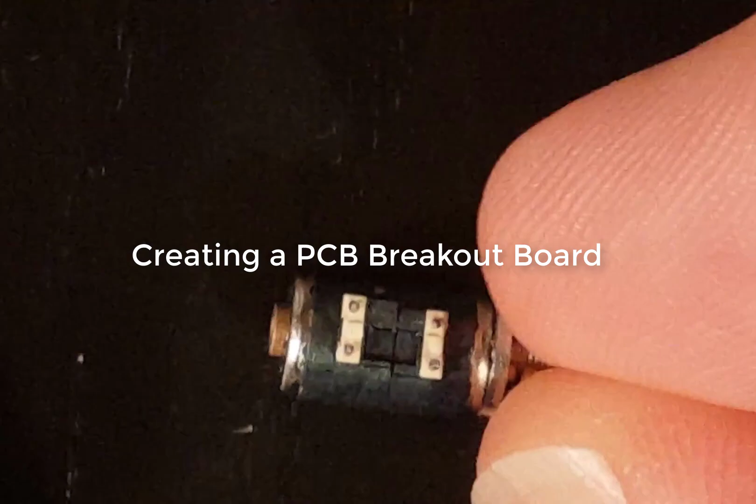I am going to try to connect this little stepper motor. You can see how tiny it is compared to this NodeMCU and this DRV8825. But I need to get wires connected to these little pins. You can see how tiny they are.

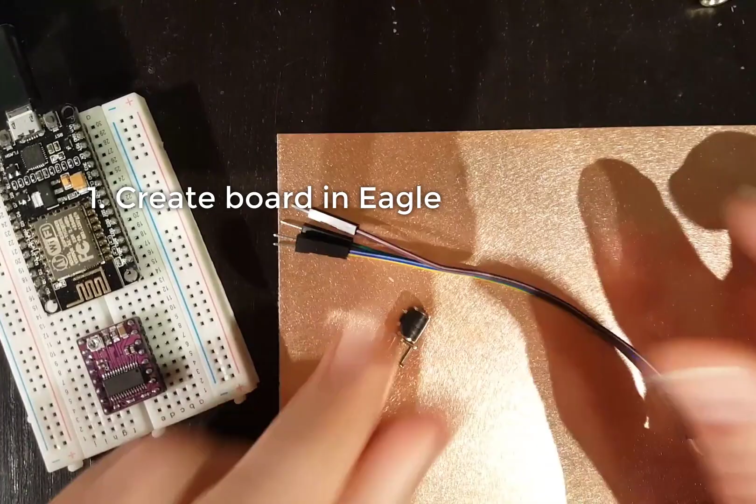So what I'm going to do is take this really thin FR4. You can see how thin it is. It's about 0.8 millimeters thick, and I'm going to mill it out so that it sort of makes a connector. Because I've got to connect these 4 wires to it, I'll kind of cut these off and solder it to it. So I'll show you how to make the board in Eagle, and then how to use ChiliPeppr's Eagle board import to mill it out.

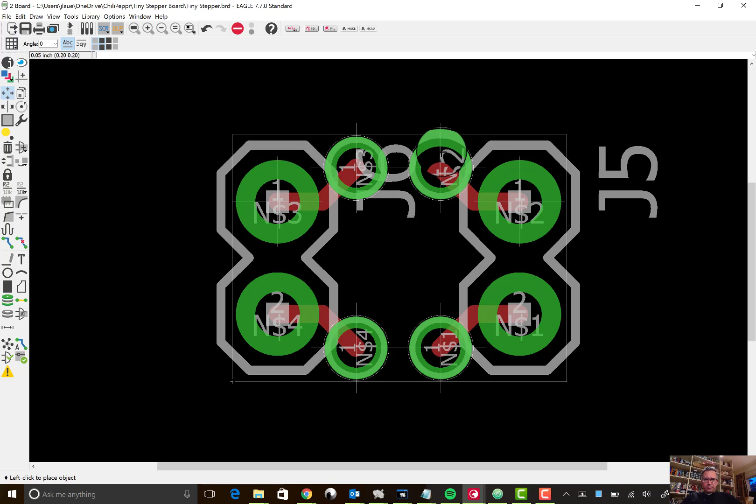So I'm in Eagle, and I created a quick schematic. I'm generally mimicking the layout of the circuit board. And here's the board I laid out. The one thing I had to do was really make sure that these pins were the correct dimensions away from each other. So we'll save that out, and then I will drag this board in. So of course ChiliPeppr's got an Eagle board import widget that's got some pretty nice features to it.

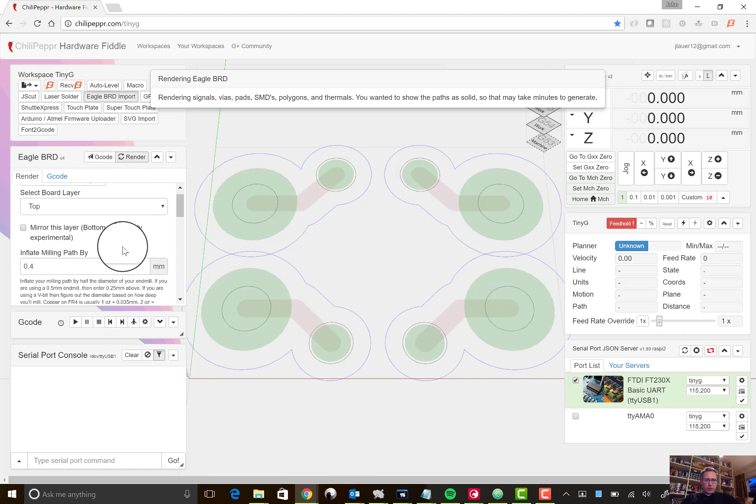The important part is I only have a top layer, the milling path. I could probably go a little bit wider. Let's say I did 0.4, and when you tab out of that, it's supposed to re-render, but here I'll hit render. And they kind of overlap, which I don't mind because as it drills, it'll create isolation traces anyway. But maybe for the sake of cleanliness, let's see if 0.35 gives us right at what we want. No, we'll go a little bit smaller because you can still see there's a little bit of overlap there.

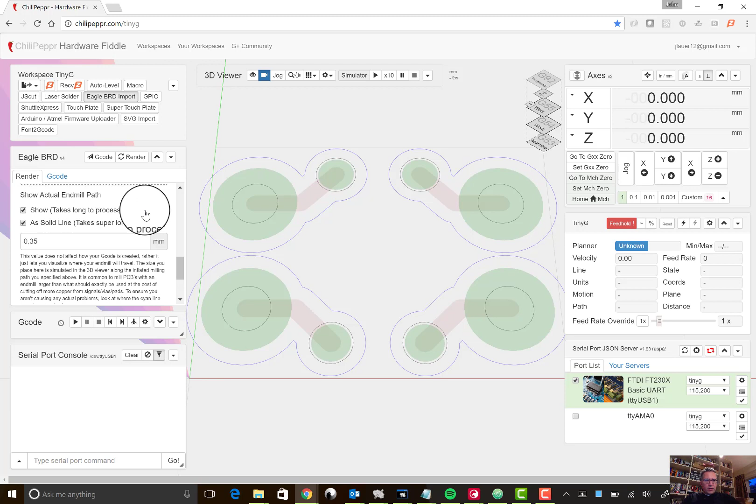So we'll just do 0.3, render that, and I don't need to do any advanced inflating. We'll show the actual end mill path, which takes a little bit longer to render, but not bad on a tiny thing like this. So you'll see that my end mill is, I'm saying it's 0.35 millimeters wide. Now, the end mill I'm going to use has sort of a V-tip to it, but that's still a pretty good estimate. And then that should do that.

And then for the Gcode, it's a 1 ounce copper, right? So I could do exactly 0.035. That's a little light in terms of detail. I could go 0.07. Let's just go 0.06. I'll go really narrow on it. The problem if you don't go deep enough is you may have to go back and mill again, but if you go overly deep, you are beating through your end mill, because the FR4 underneath is a very tough material. So you really want to try to limit that.

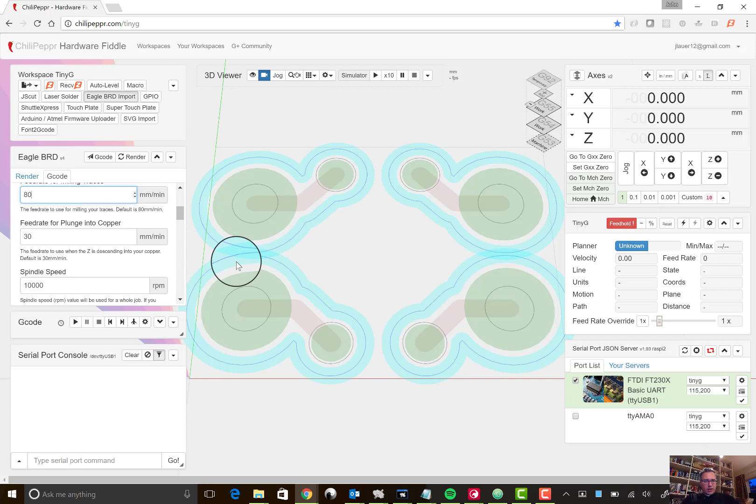Feed rate for milling traces, I leave it 80. That's the default. It's pretty slow, but it's pretty safe. And then the feed rate for plunging, that's pretty safe. Actually, that's the plunge down into the trace. 10,000 RPM is fine. I think the default's 12,000. The clearance for Z moves, you could go higher than that, but it just doesn't matter too much because I'm going to probe the board.

And then I do want to drill holes, so I want to mark the holes for drilling. What that does is the end mill that you're using to do the traces just puts a little dot in the middle, and it makes sure that when you then come back with a drill bit, it doesn't bounce around. Depth for drilling holes is the board depth. Maximum hole diameter shouldn't matter. Feed rate of 100. For the diameter of tool cutting for dimension, I'll use a chip breaker at the end. I'll show you that end mill.

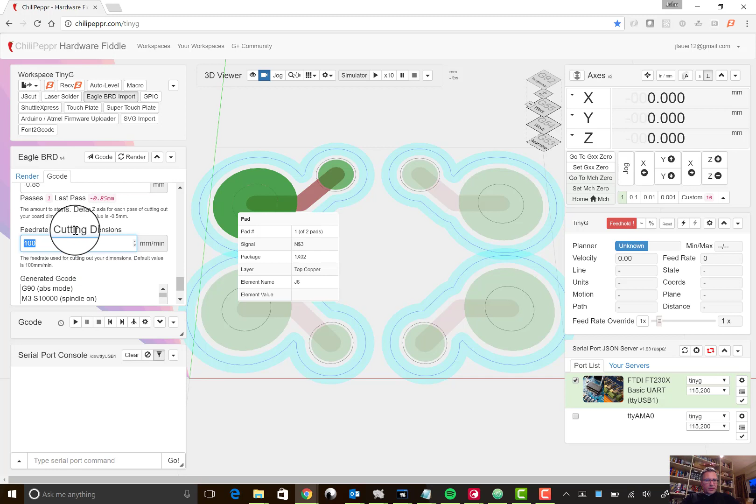So depth of cutting out dimensions of board. My board's actually 0.8. I'm going to go a little bit deeper than that just to go into the waste board underneath. And the step down, we'll make it just be 1 pass. So that should be exactly 1 pass. And then 100 millimeter. It's still pretty slow. You can cut and paste this Gcode if you want. But now that I'm happy, I will send the Gcode to workspace. I'm finding that doesn't always seem to appear, but the moment you turn this off, it's there.

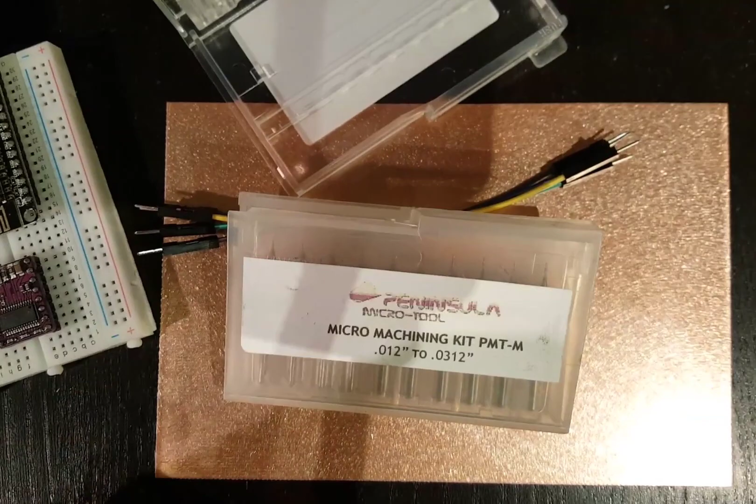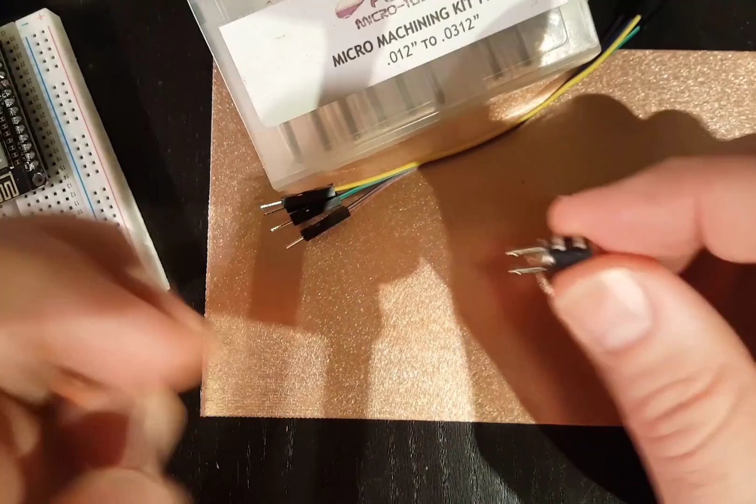So I'm looking at that trace that I just laid out using that thinner end mill, and I decided I don't want to beat on it because it's a $28 end mill that does the 0.35 millimeter trace, and I just don't need that detail, so I'm going to use one of my cheaper end mills. This is 0.6 millimeter, and let me zoom in here. The part I'm worried about is the width between these pins. This is the only detail part, right? The trace is this way, there's plenty of room.

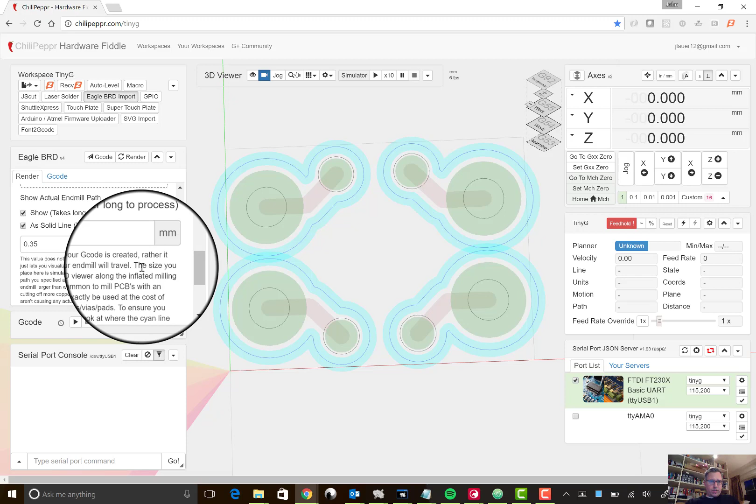Okay, so we're back in ChiliPeppr, and we had the milling path being inflated by 0.3, but what you really want to do is visualize how your end mill is going to cut. So my end mill is 0.6, which I'd rather use because it's a cheaper one, and I can definitely get away with it on this job.

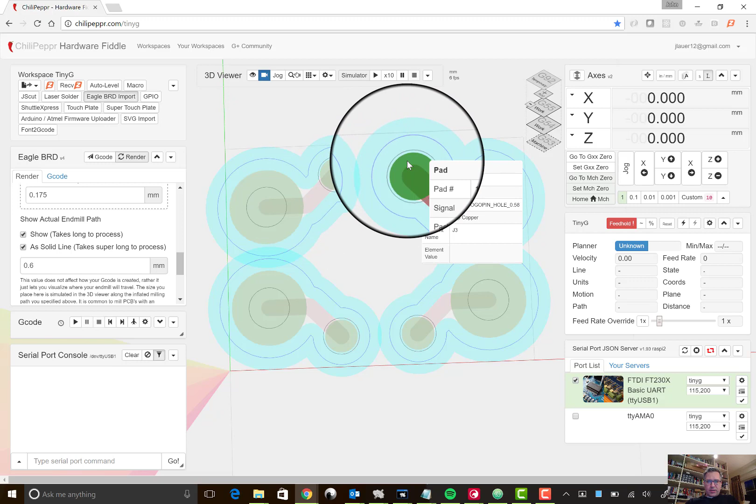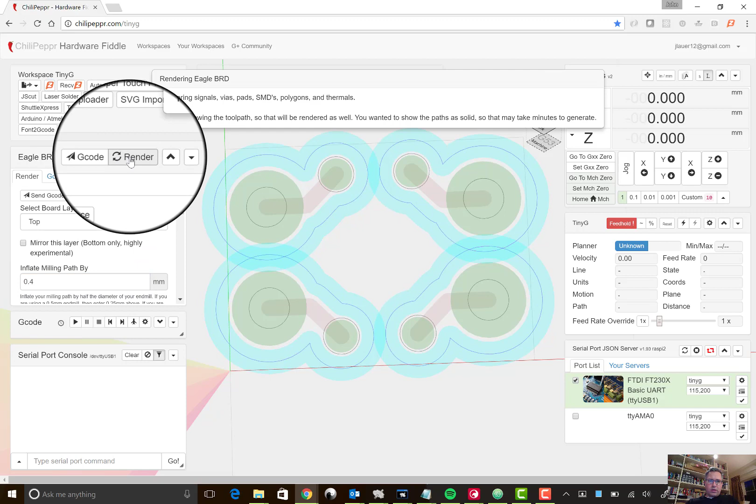And you know, over here I get a little bit far, but I don't care about this end mill path swiping into this. Even let's go 0.45 and just see what that looks like. Okay, so that's pretty reasonable overlap. And this way I think I'm pretty good.

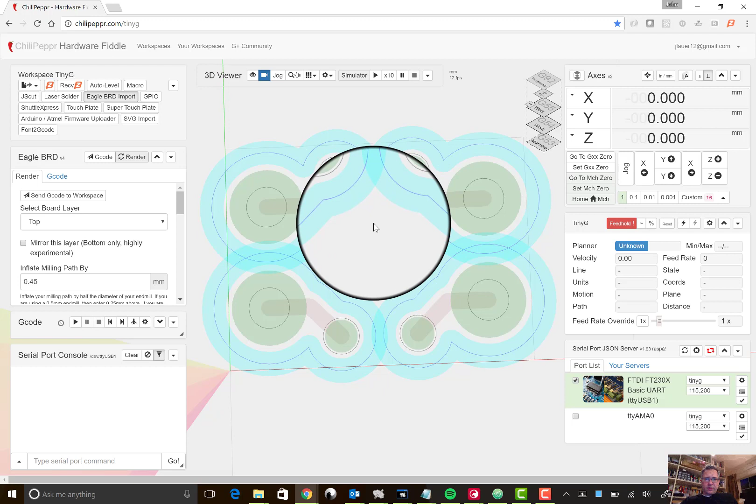I mean, I'm almost gonna get the inner blue line to intersect, because all of this non-blue area will end up being copper. Remember, the light cyan blue is just the isolation trace. You do want your traces kind of wide, since you're not going to put solder mask on this. I have found that you can end up with just the flux sort of flowing into the channel and causing a connection. So the further it is, the better. That's pretty nice. I'm going to go with that.

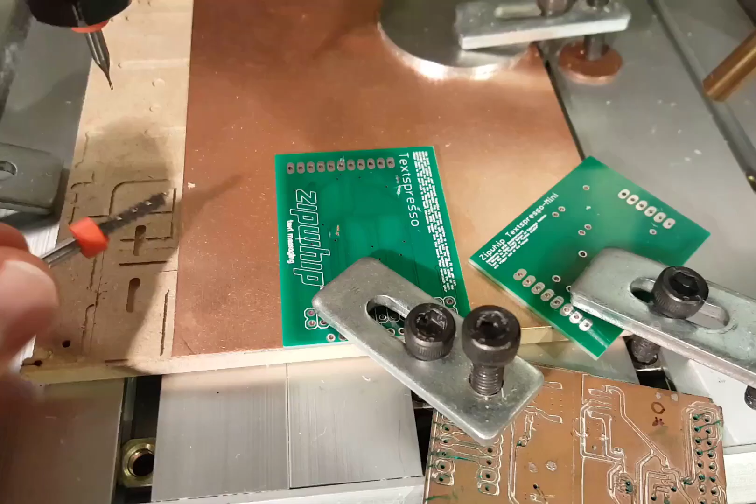Let's send the Gcode to workspace. Turn off Eagle board import. And there you go. That looks about correct. And that overlap there looks correct. All right. Board set up and ready to go. But I decided this is the chip breaker I'm going to use to cut the FR4. That's a 1/8 inch, so 3.175 millimeter. So I got to change my Gcode.

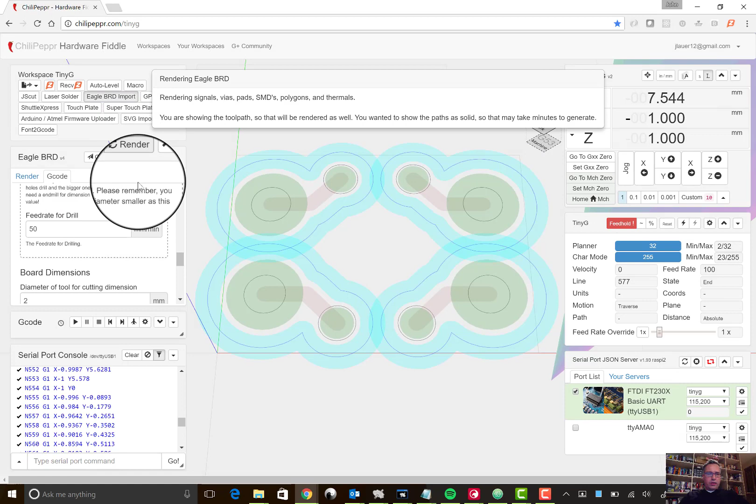All right, we're back here in ChiliPeppr. I'm going to go back to the Eagle board import, flip it back on. I'll hit render, and first of all, I want to turn off, yeah, I turned it off already. I'm going to turn off mark holes for drilling, because I decided I'm just going to drill the holes with the 0.6 millimeter end mill. So even when it asks for a tool change, I'll just continue to use the end mill and not change tools. Here we go. Diameter of tool cutting.

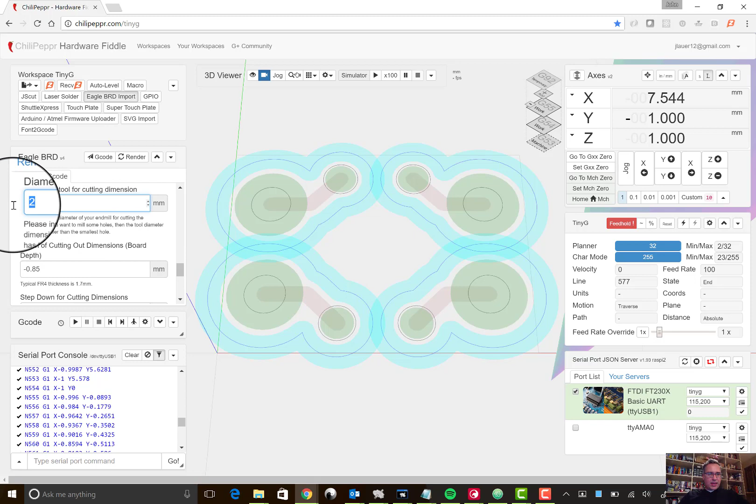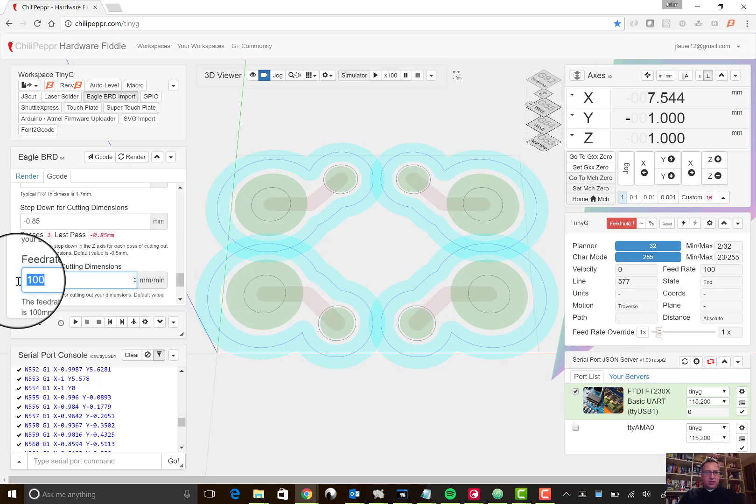So 3.175. And when I render that, that won't matter. Depth of cutting out board. I know it's 0.8, so that one's fine. 0.85. And then feed rate for cutting dimensions. You know, 100's probably pretty safe, but let's just go 80 since I'm doing one pass. It's probably unnecessary.

The other thing I'm thinking is when I'm cutting, well, I'll show you. I'm going to send the Gcode to the workspace. Okay, it's wider, so that's good. It starts here, so it's going to take away the board over there, which means the board on the left and the right is going to come out the moment the end mill reaches right around here. So that's probably fine. I don't need this board to be that precise.

Okay, now let's auto level. For auto leveling, I can just take my touch plate and rest it on the copper, because that's obviously going to be conductive. And then I need to attach this, and we should be safe to get going with the auto level. And then you want to jog it to the correct location to get started, meaning you want to get close to your absolute zero. So you're going to want your X and your Y in the 0 position. Auto level only does the Z position.

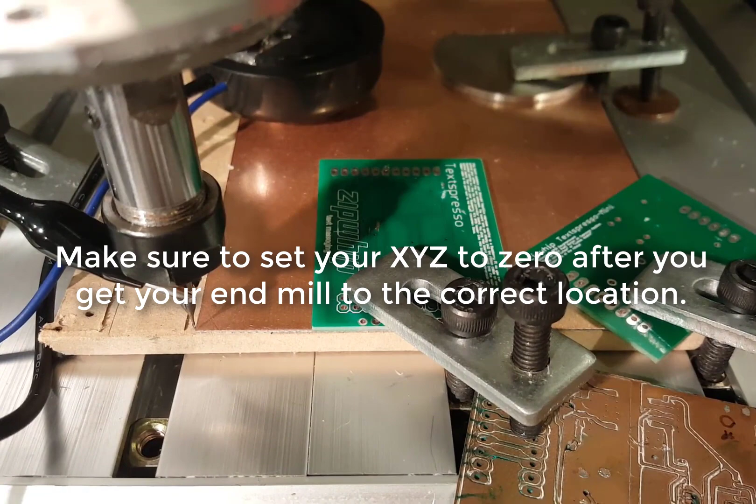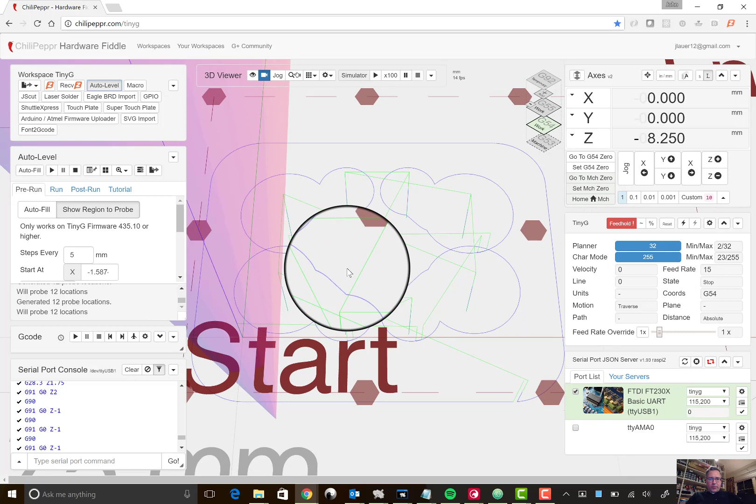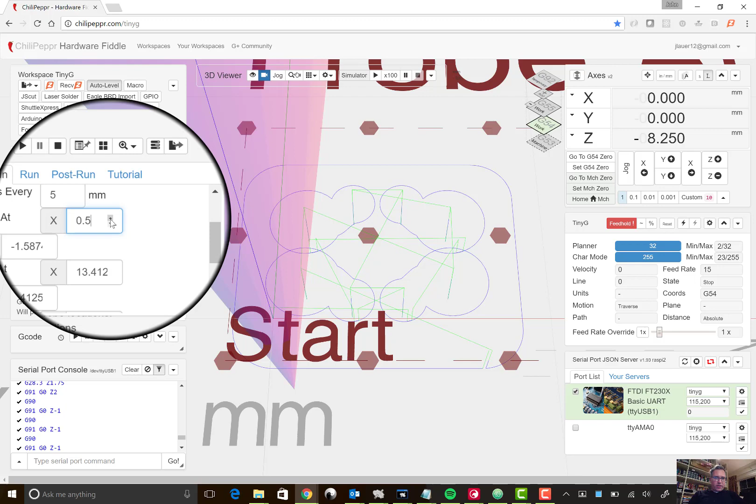All right, we're gonna now try the auto level now that we've got our XY pretty dialed in. Okay, so keep in mind the auto level starts automatically way out there, but our board is at this 0 over here, so we've got to adjust that. We want to start at 0. Even then, I'm going to cheat and start at 0.5, 0.5, okay? Because I actually don't want to probe right at that corner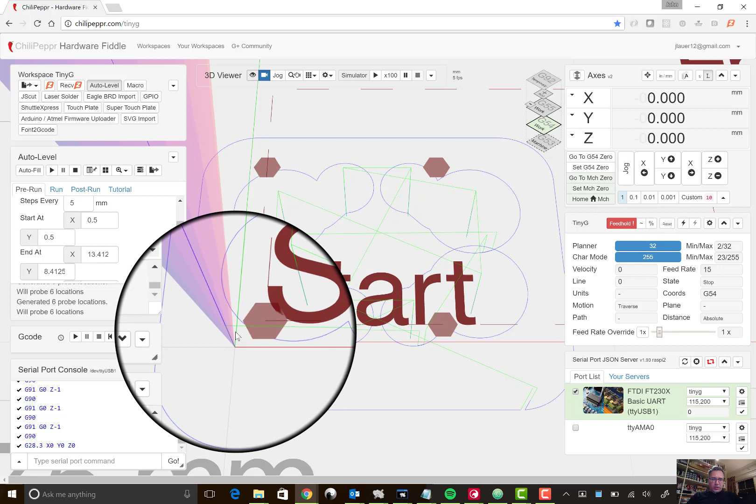because it's dangerous. Oh, let's set this machine to 0. I forgot to do that. I'm glad I just did that. It's too hard to probe that corner because there's only a tiny bit of copper that end mill will touch. And we're only going to really probe 4 points here, it looks like, because it's unnecessary otherwise. So I'm going to do steps every 2 millimeters. So let's end at, let's say 10 and see what that does. Yep, that looks clean.

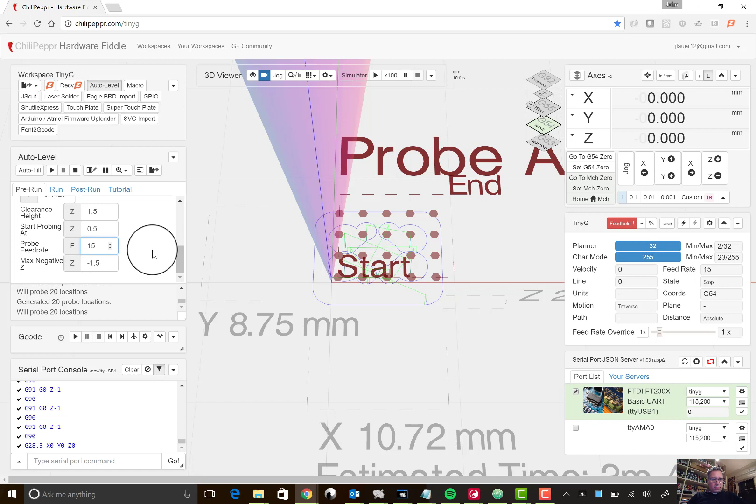Okay, let's do the clearance height is 1.5. Start probing at 0.5 millimeter. Probe feed rate, I'm going to go even slower. I know it seems odd, but maybe not. And then I already tested the probe, so I know it's working. So let's go ahead and give it a try. But, you know, I always have my finger on feed hold if this screws up.

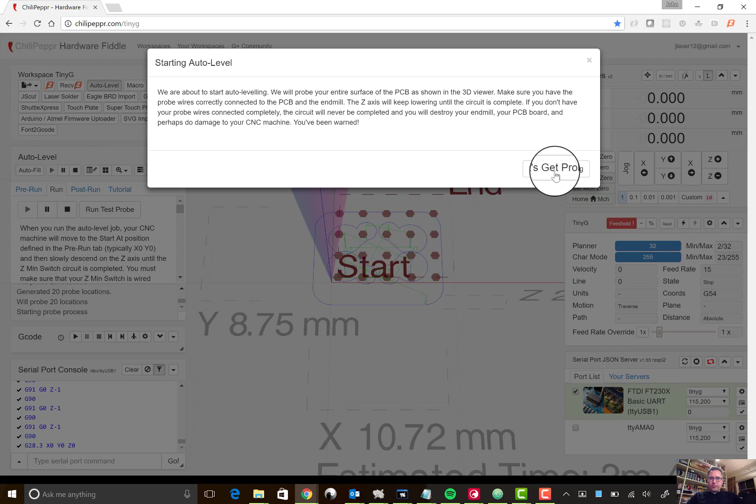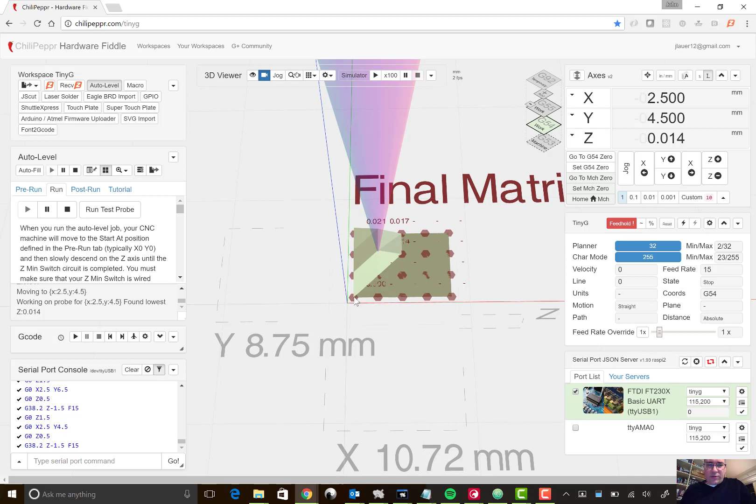You'll notice what it's doing is it's showing you the warpage of each point. Obviously you can tell it's not that far off, but the first point that it does in the lower left corner becomes the 0 reference. And then everything else is sort of, is it higher or lower from it? Such a cool feature. I love this.

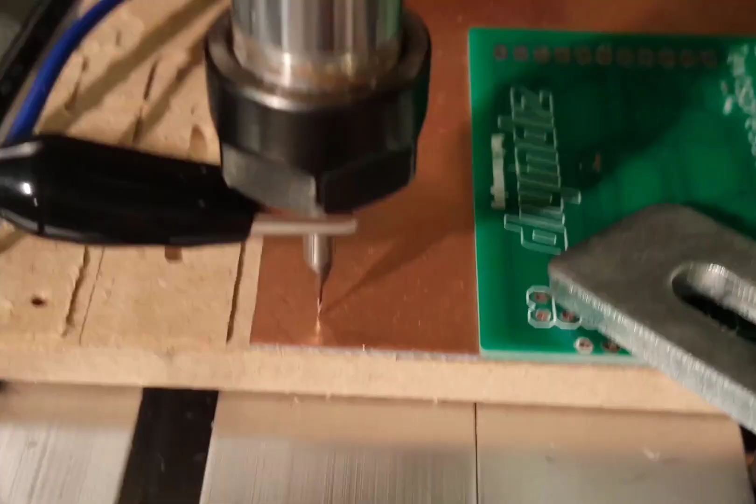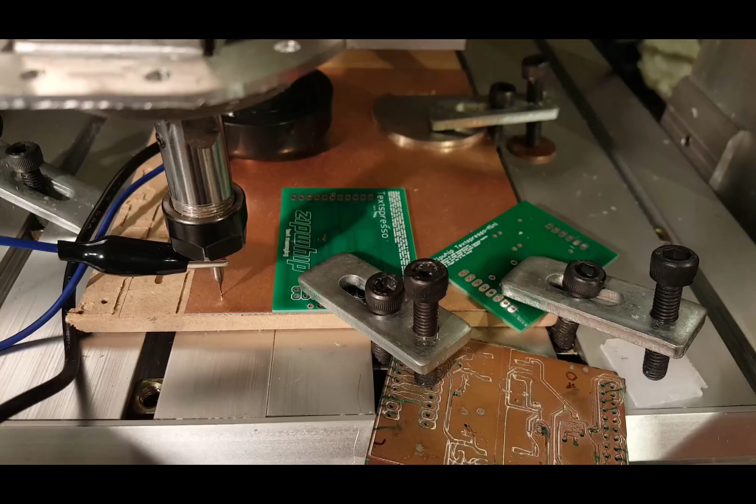Okay, we are done probing. Looks awesome. And then what you do is you send your auto level Gcode to the workspace. And just like that, we can now turn off auto level. Okay, now you want to take off your touch probe and get ready for milling.

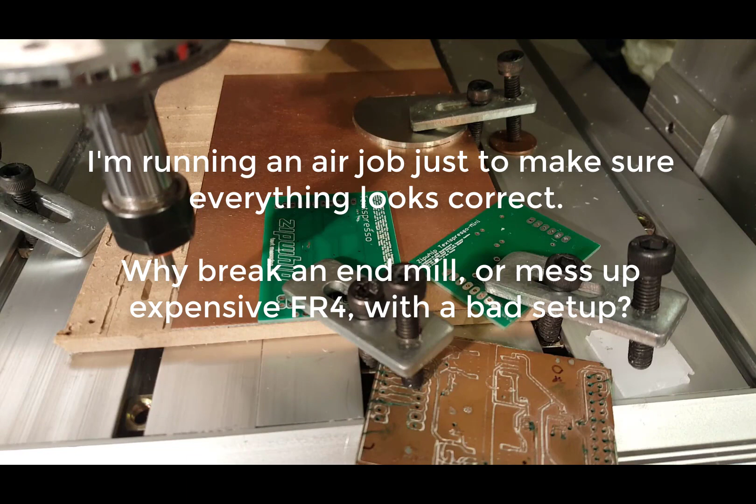Okay, so I'm a little bit worried that I doubly modified my original Gcode with this auto level. So here's how you fix that, just to really make sure. You don't want to auto level twice because you'll actually adjust your Z's too much. I was thinking more about how the auto level showed that it was going lower than the amount I was milling with anyway. So here's what you do.

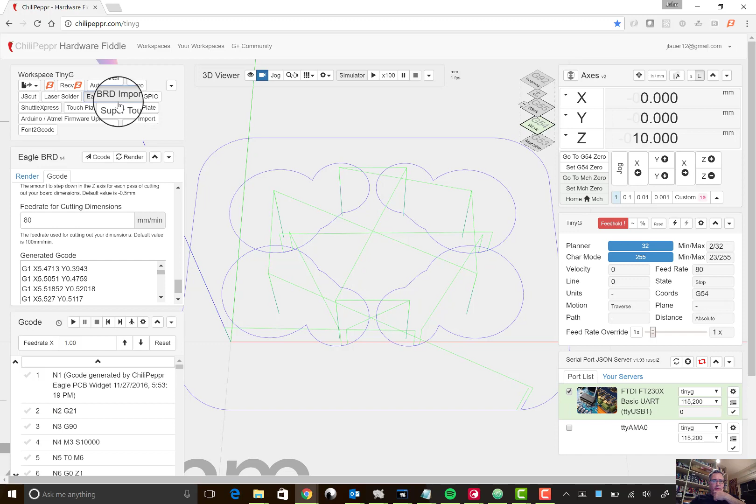You go back to the Eagle board import, you re-render, and then you resend your Gcode to workspace. Let's just see if that works. There it is. Just running slow, probably because I'm video recording. So I turn that off, and then I want to review here and just make sure there's no Z mods on any line, and you can see there are none. So nothing's been modified, because there's only X and Y values spit out by the Gcode widget. So that looks really clean.

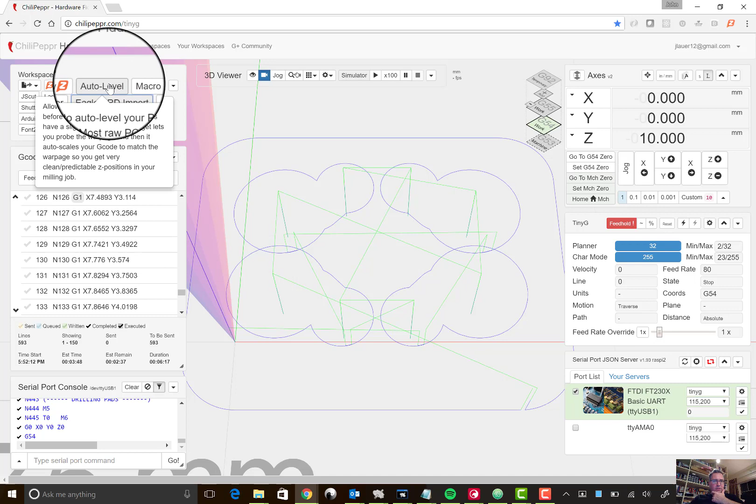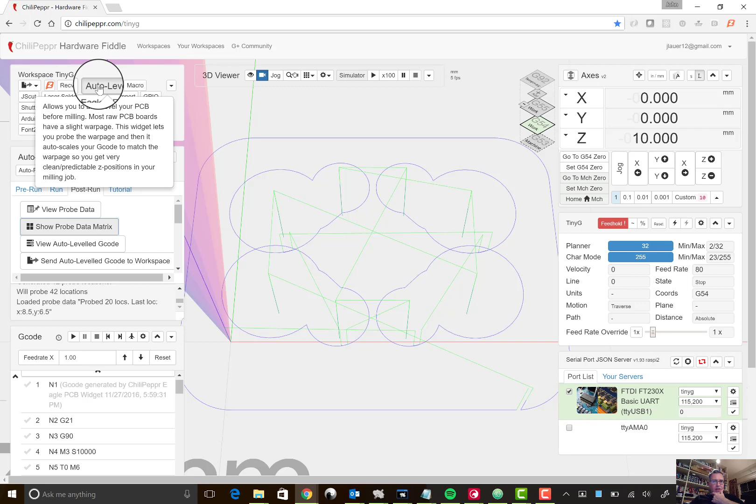And now we'll go back to the auto level. What it does is it still saves our previous data. So you can go up here and say, see how it auto-saved it? So I'll load that, and then we'll send our auto level Gcode to the workspace. Now we will turn off the probe data matrix and go back. We'll turn off auto level. And we shall now see and hear a bunch of AL mods.

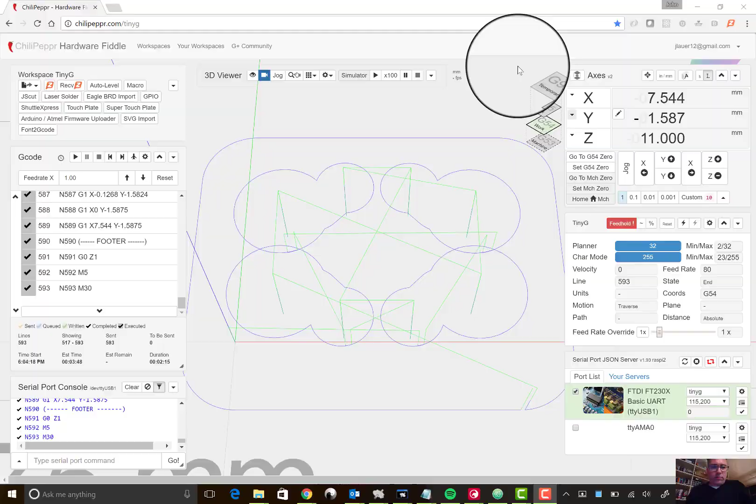Okay, we are ready to run here. So I switched back to G54 so that I'm back in my normal G54 coordinates, and we're going to get going. So turn on the spindle and hit start.

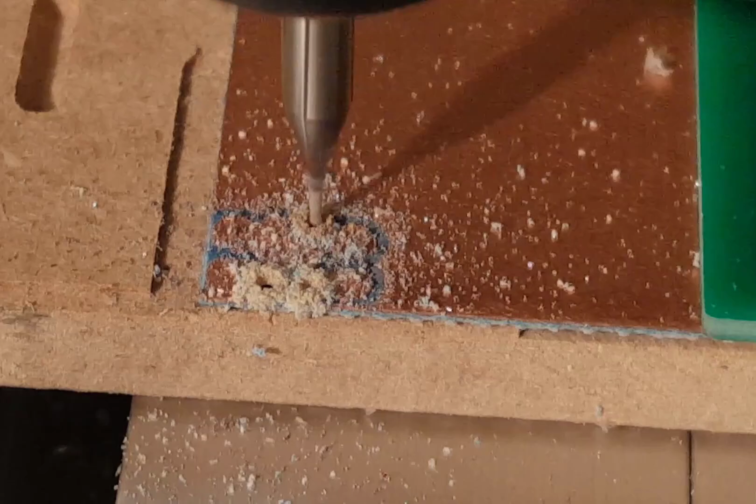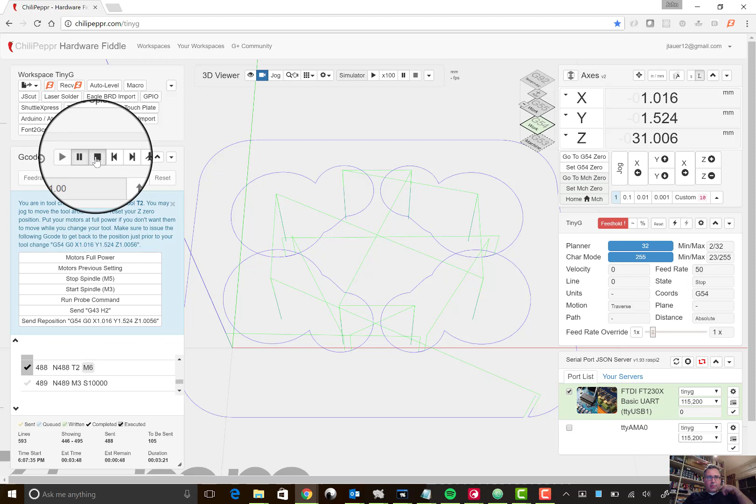So you can see that the copper did not get milled off there. It didn't get milled off here either. Now that doesn't matter a ton, although it sort of does because this looks connected. And that doesn't matter either because that's isolated, but I'm going to just run it again. Okay, so we are on a tool change pause, which I'm going to just stop the job. Remember, line 488 is where we're at, but we're going to rerun it.

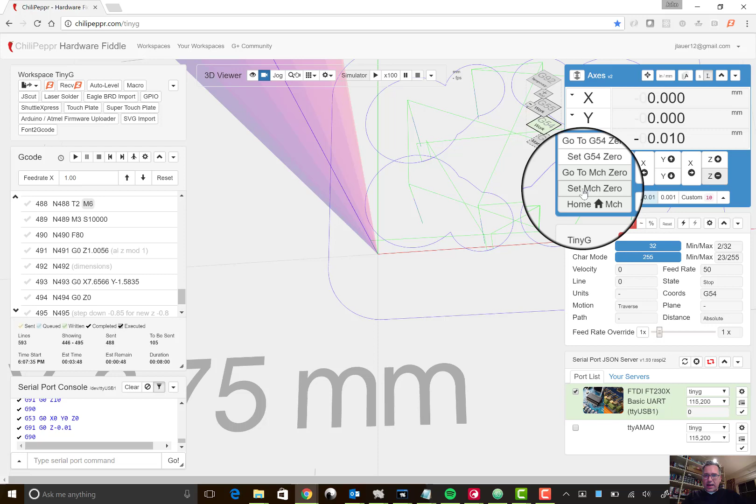What we'll do, though, is I'm going to go to machine 0. And notice I'm right at the Z0, and I'm going to go down, not 0.1 of a millimeter. I'll go down by 0.01 on the Z. Not much, right? But we were milling at 0.06. I even recommended to mill at 0.07. Let's see what happens there and rerun it. So what we do is now we set that as our new machine 0. Okay. And then I'm going to turn on the spindle and hit play again.

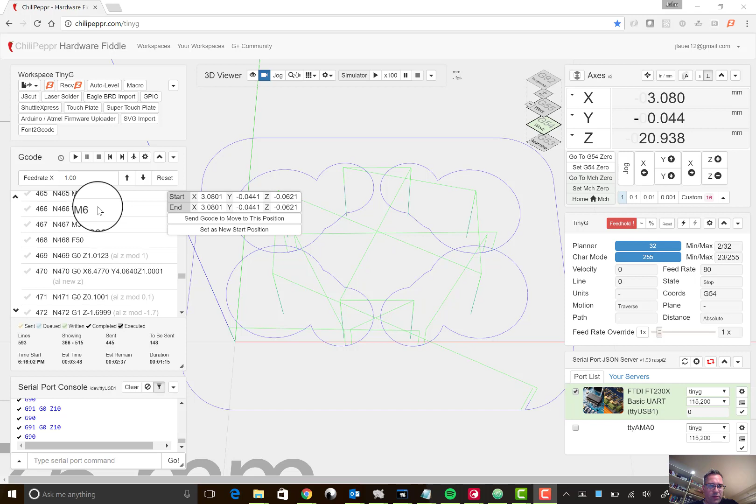Okay, let's now go ahead and mill out the dimensions. So I think 445 probably was correct. What we do know is that this move, if you hold down the shift key, that's line 590. Oh, that's on the way up. We want the one on the way down here. Let's do this one. That's line 493. So you can just say go to. So we know that the dimensions start right at 492.

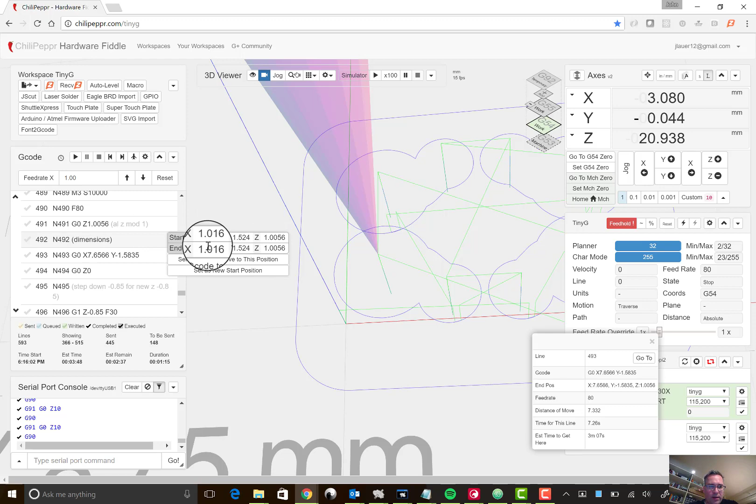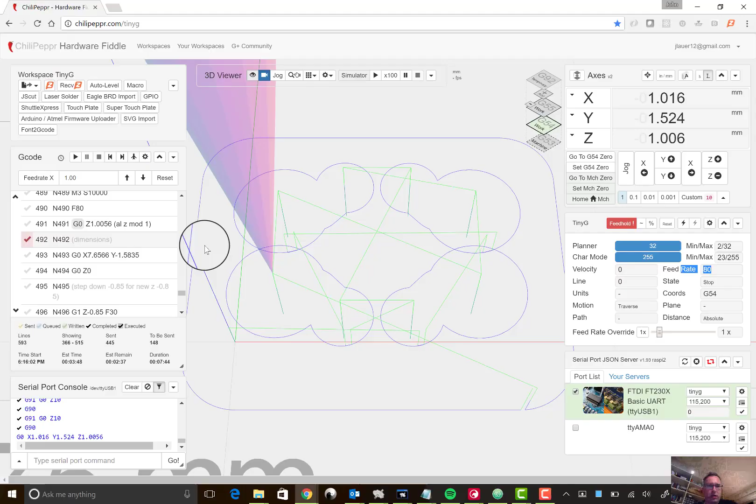So we will, the Z is starting here at 1. So we'll go ahead and send Gcode to move to this position. And then we should be moving, yeah, we'll set this as our new start position. That should be correct. Zoom back out, turn the spindle on, and go ahead and hit play.

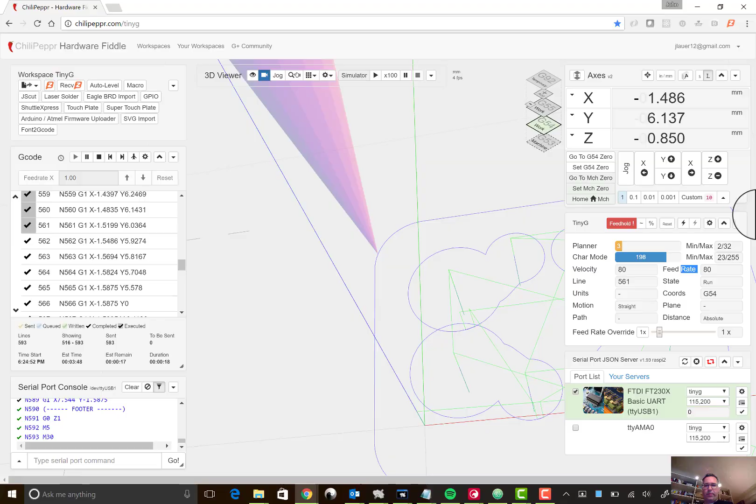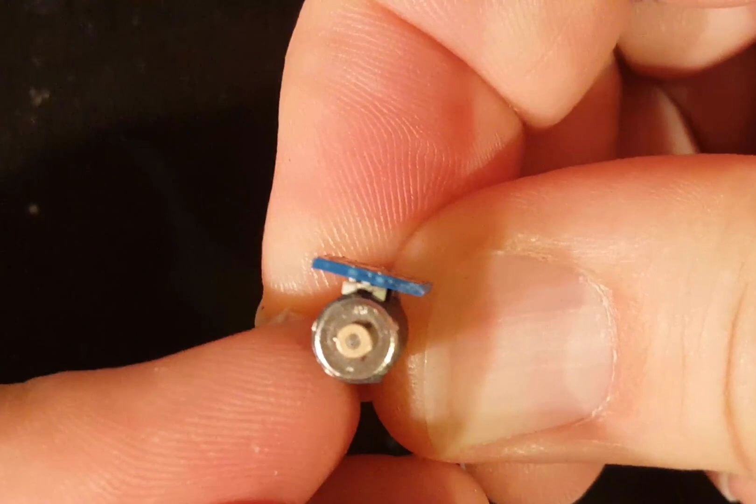Okay. We can hit feed hold here. We don't need to go the rest of the way. We'll wipe the rest of the job. And we are done. Okay, fits on like a charm. You can see it's right on there. And a beautiful little breakout board.

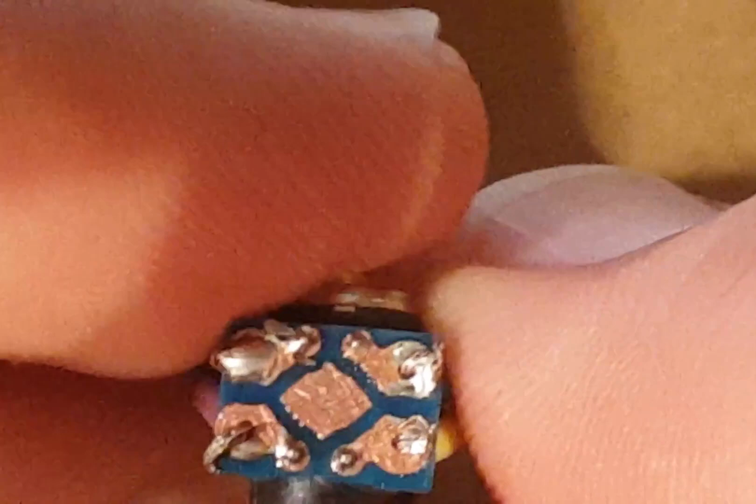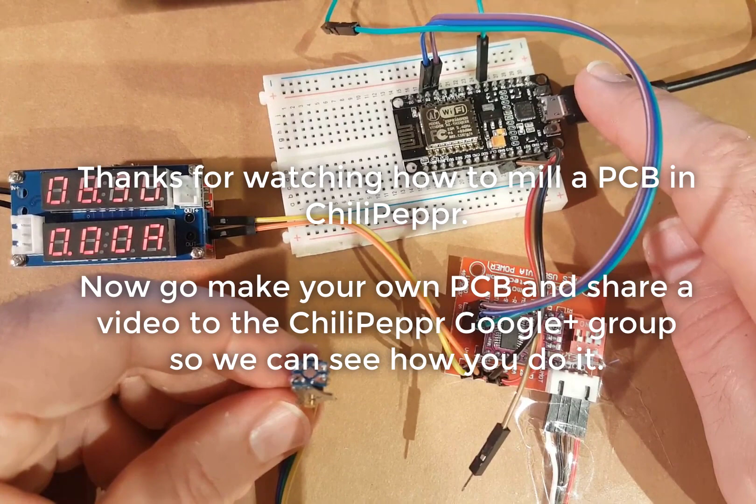Look at that. Motor's working. So the circuit board, nice and tiny. But you can see that the 4 pins to the motor are soldered in there. The way this is set up is I've got a DRV8825 running, and I've got a NodeMCU that I programmed through ChiliPeppr in the NodeMCU workspace. It's running Lua, and it's just sending step and direction signals to the motor, and then I'm powering it with the lowest voltage you can possibly power this thing with, which is 8.5 volts.